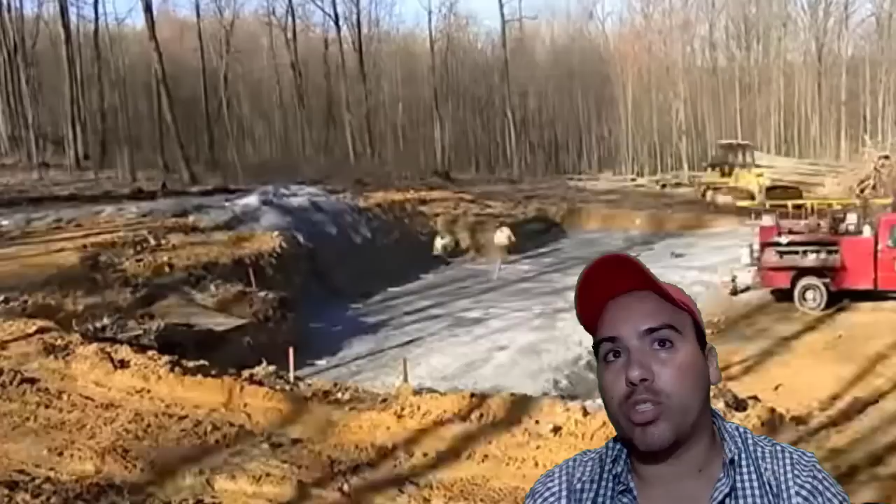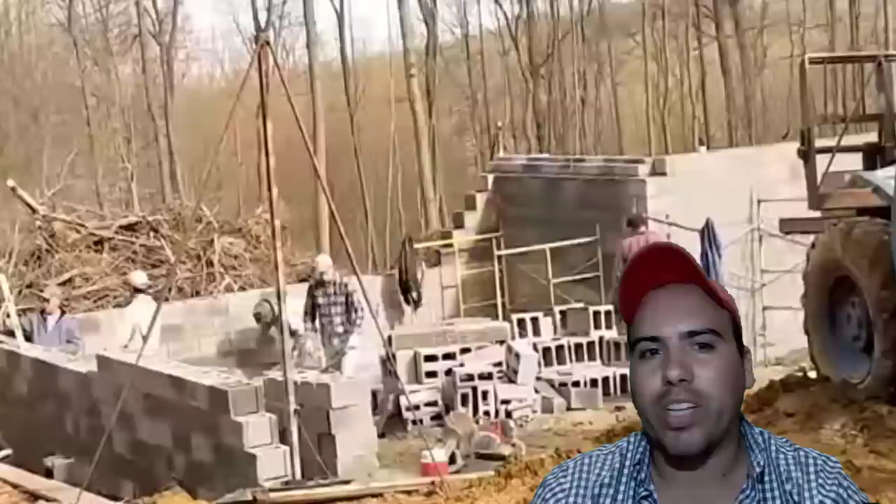I'm an architect, and I'm going to show you the main difference between building a house here in Mexico and building in America. Whether it's because you want a retirement home here in Latin America, running away from the bad weather, the snow and cold, you need to know there are several differences between building here in Mexico and building in the United States.

Hello builders and contractors. First, I want to tell you this is going to be a hard one, because not even in Spanish do we agree on the terms we use in building. I'm going to be using Mexican Spanish, but even within Mexico, in different parts, the same things I call here are called differently in other parts of Mexico.

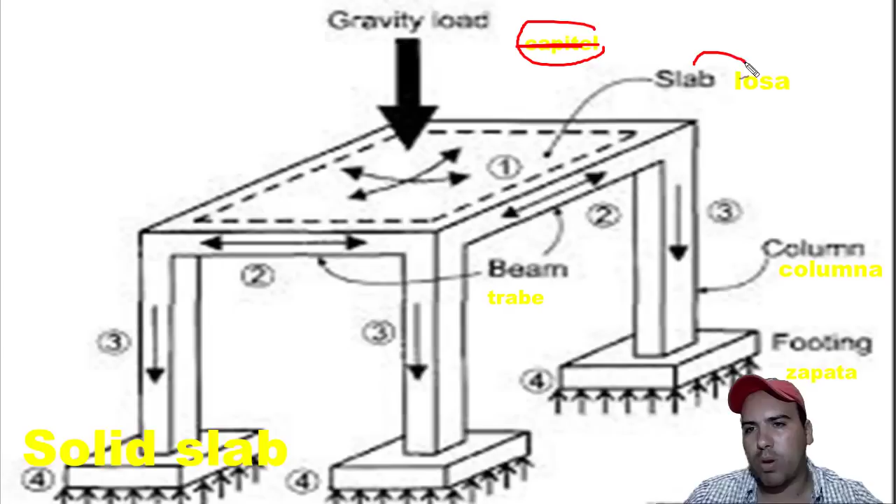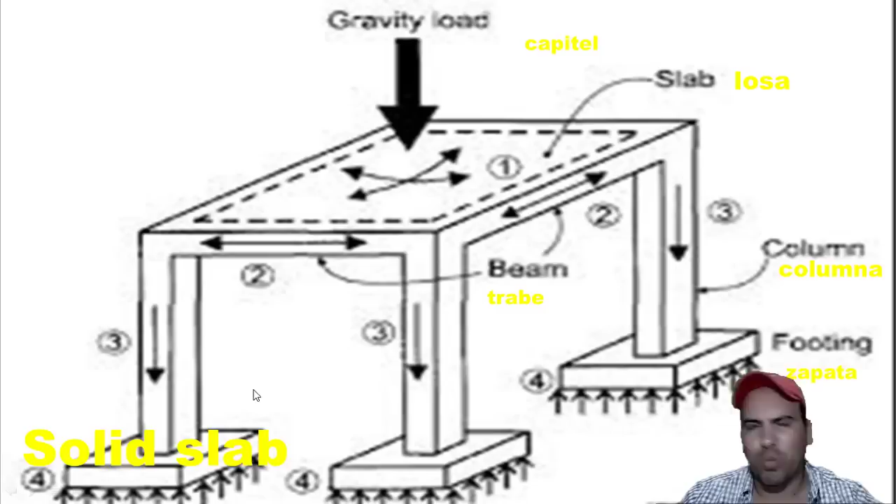So first we'll start with the foundation, and as in every construction, we do the excavation to find out the good soil. After we do the excavation and separate the good soil, we do the foundation, and this is pretty much the formwork for the foundation.

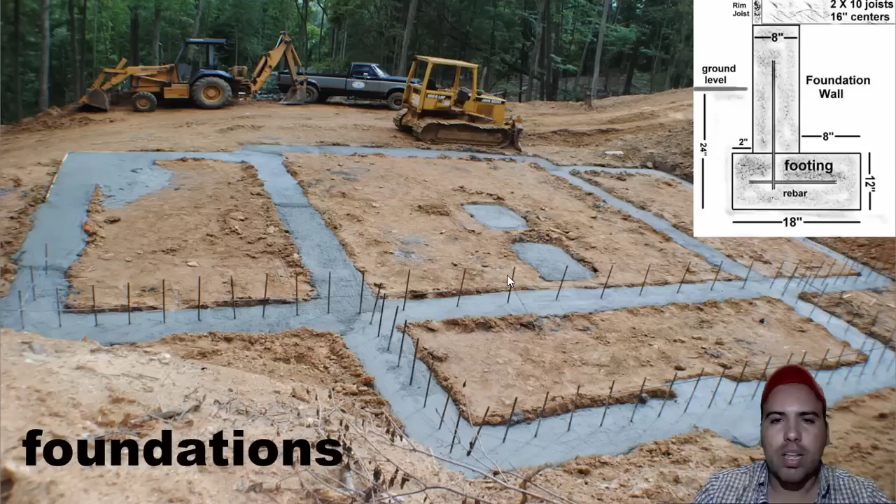This is pretty much the foundations here in America. I will not say those are weak, but it's because you guys use wood for home construction, not for big buildings. I know you use pretty much the same procedures, but those footings aren't as big as what we use, because bricks are heavier and things like that. So it depends—it's because you guys use lighter materials.

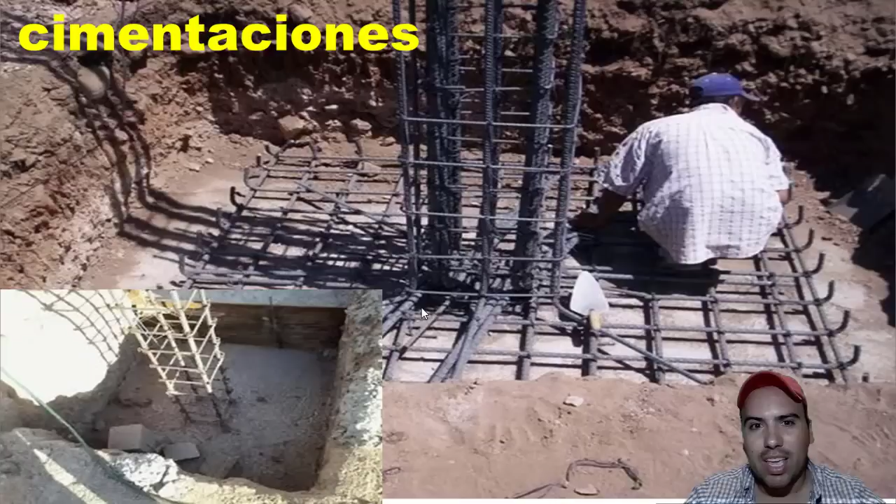We pretty much use concrete in Mexico, and the sizes are bigger because we have all the pressure that spreads out. If you have bigger weight, then you need more area to spread all the weight that goes to the ground. And on the soil, you have to check the strength of the soil.

We do not use them unless it's like sheetrock work, especially when it comes to interiors. So we're kind of familiarized with this kind of work when it comes to sheetrock, and also the gypsum boards. We use them on pretty much interiors. But we do not use the studs and also the joist stuff, unless it's like, you know, there are several parts of Latin America, I don't know, I'm pretty sure that Chile and also some parts of Mexico where they have a lot of forests, they use this system but not very much.

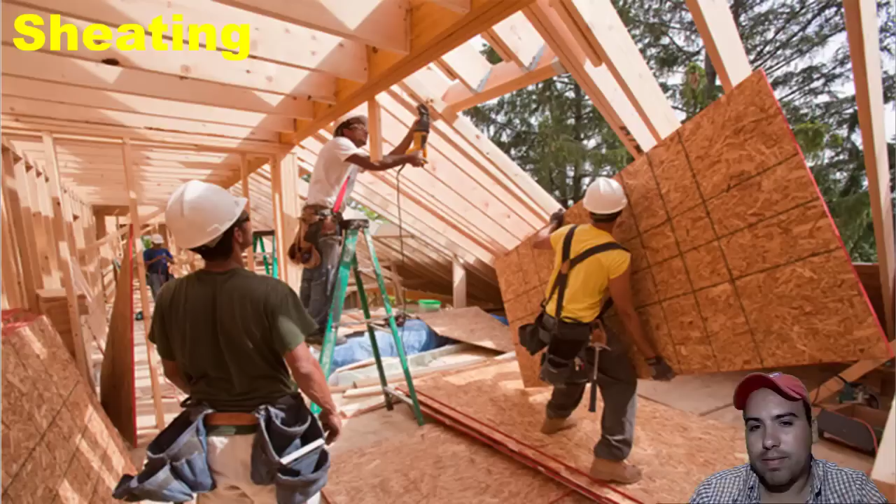Now you see more examples of framing, and this one, after you guys are done with the framing, you guys start doing the sheeting. This doesn't stop until you do the sheeting and all the layers. I'm not here to detail everything, I'm just doing the general thing so you get an idea of how we do things, and why we do not have all these sheetings, all this stuff, like the insulation layers, which this system is pretty much saying that it's saving you.

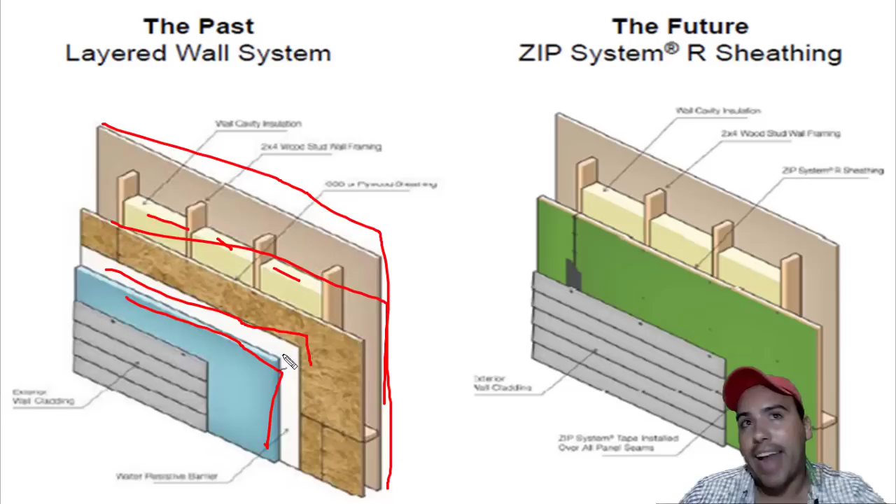You only do the siding and cladding and everything, but we don't have it here in Mexico because we use a different system, which is the bricks and pretty much the mortar we put on the walls, the plaster, and also the tie columns, we call them castillos, and also the bonding beams on the top are called cadenas. And yeah, pretty much that's how we start building homes here in Mexico.

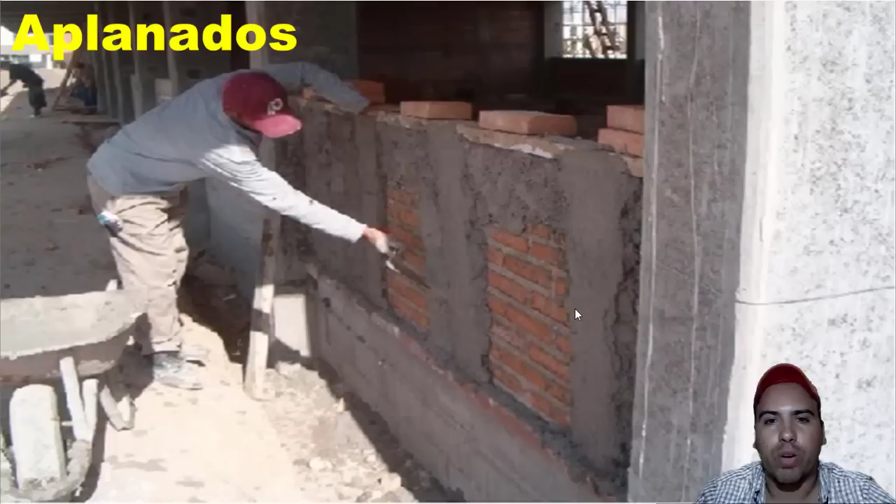Now, when it comes to Mexico, we don't do the sheathing. After we're done with the bricks and the structure, the concrete structure, we do what we call aplanados, which is pretty much kind of like stucco, but it's not stucco. We do know stucco, but we do it with a mortar, which is pretty much made of cement and sand. And after we mix them, then we start putting it on the walls. We do level them. And also, because the bricks are not perfectly made, so some of them might be off, and we have to fix them with the plaster on the walls.

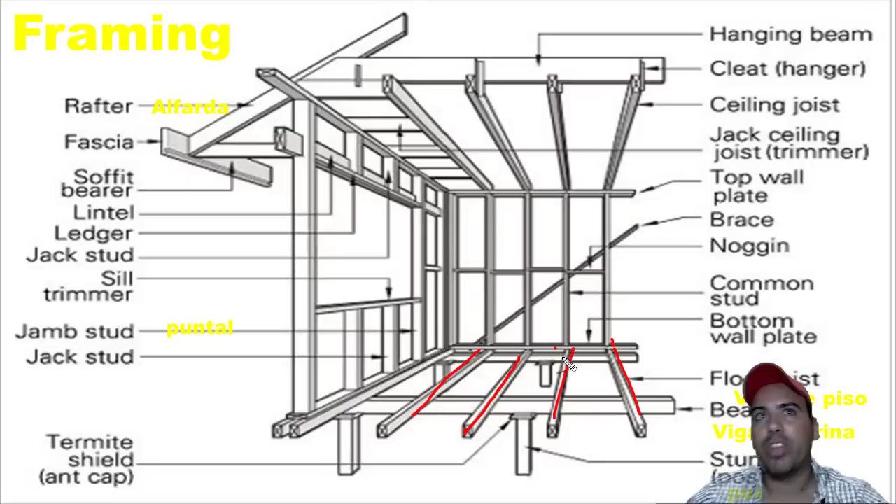When it comes to floors, you use joists, slabs, and also some sheathings, which is shown here. But when it comes to Mexico and pretty much a lot of parts of Latin America, we do use concrete slabs, like the one I showed you first.

So when it comes to slabs, there's the grid slab and also the solid slab. I'm going to talk about the grid slab because it's like the hardest one, and the solid slab is pretty much easier to explain and also to figure out.

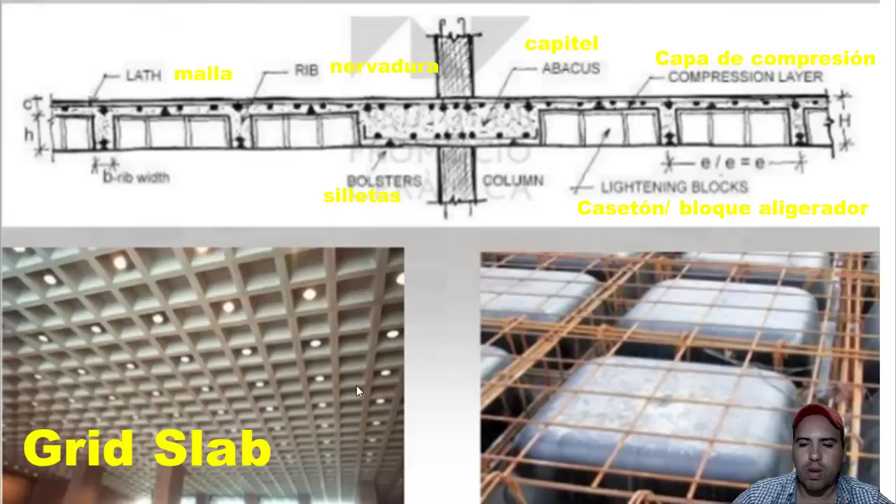And when it comes to the plumbing and wiring works, in Mexico we call them installation to both, because I didn't find the word, facilities or anything like that, but we're pretty much installing, like the plumbing, installing wiring and everything. So we call them instalaciones, which is installations.

So when it comes to plumbing and wiring, we're pretty much familiar with that, because we also do the sheetrock work, and when we do sheetrock, it's pretty much like the same. So if you are employing Mexican hand work in the United States, they're used to it. The only differences here in Mexico and the United States is like this.

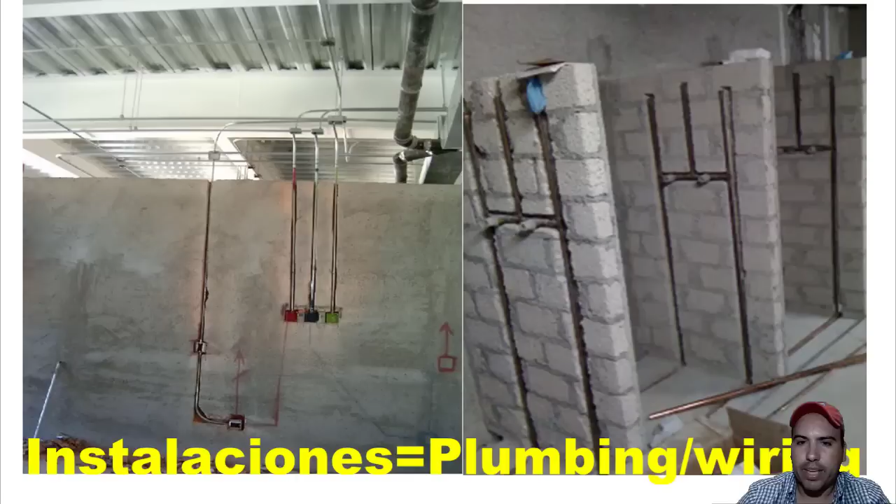The wires, we use like some sort of orange hose. You're gonna see it on the next pictures, because we do groove the walls. Since we have brick and mortar walls, we do groove the walls. We also use the piping, the conduit piping, and then we groove the walls.

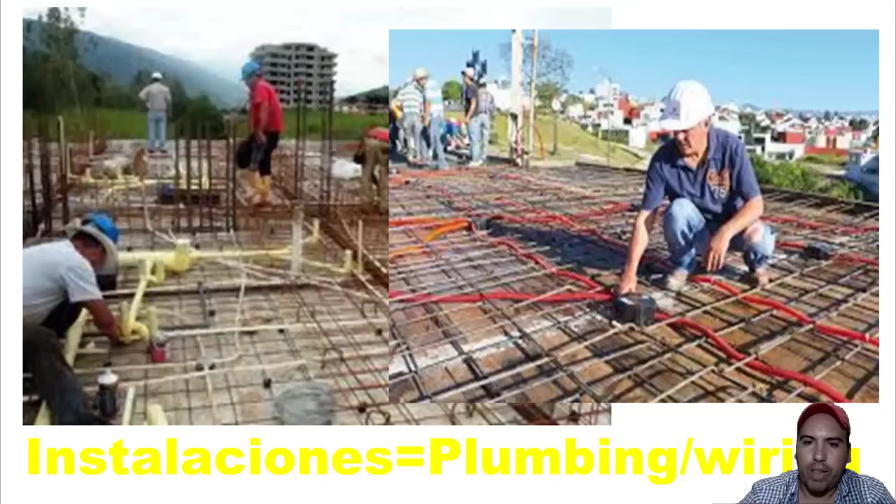And then we put the hoses or pipes, whether it's plumbing - we use pipes for plumbing, and we use hose, or orange hose, for electrical wiring.

But when it comes to, if it's like a slab, if you happen to be an architect and you work in big construction works, and they pretty much do the slabs with concrete, we pretty much embed all the installation when it comes to homes, and the hoses like this, all the.

I do not recommend embedding the plumbing on the concrete, because when you want to do a repair, it's kind of hard to do. I don't mind with the electrical wiring because it's easier, if you want to just pull the wire and that's it. But when it comes to pipes, if a pipe gets damaged, there's a lot of mess with the water and everything. So you gotta watch out for that.

So if you're planning on investing in building a house, pretty much tell your architect that you want all the plumbing and also the pipes, whether it's underneath the slab and you use a false ceiling made of sheetrock, or you want it on the walls. You gotta watch out, because you gotta be careful with the repairs of that.

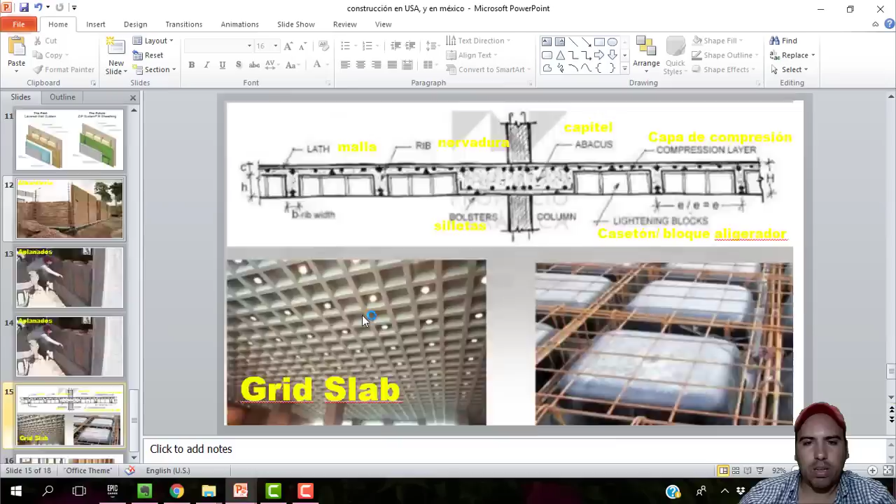Así es, constructores. Bueno, pues lo que se trata en las instalaciones, los americanos y los canadienses no tienen una palabra como tal de instalaciones. Ellos le llaman plumbing, que es plomería, y wiring sería como cableado. Entonces es muy similar a cuando están utilizando y haciendo muros de tabla roca. La diferencia es que muchos americanos no utilizan las mangueras, sino que meten el cable así tal cual en muchos lados. A ellos les encanta hacerlo así, y en muchos lados así lo quisiéramos hacer, pero las regulaciones no nos dejan y hay que tener ese detalle.

Ellos ranuran, le llaman grooving a la ranurada, y prácticamente casi no me ha tocado una obra grande en donde ellos tengan que estar ranurando. Prácticamente todo lo meten a través de los muros de tabla roca o los muros de palo, los famosos muros del framing. Por cierto, si ustedes se van a buscarlo, framing es como marcos, pero en realidad no es un marco, es una estructura de madera. Así defino yo el framing, a lo que ellos le llaman framing.

Well, this is it pretty much. Thank you for watching this. I also have like several differences between them working here in Latin America.

I've seen it in America, you guys have like specialists for everything, like the guy for roofing, the guy for wiring, the guy for this and for that. And when it comes to Mexico, pretty much all the work is made by the albañiles, you know, all the construction builders, unless it's, you know, like pretty much wiring and plumbing, those are made by specialists. For everything else, you know, when it comes to putting the concrete, also like doing the masonry and everything is made by the albañiles. Also, you know, when it comes to making windows and everything, you have to call in a specialist too. But it is, you know, it's kind of like the same in the United States and Mexico. Pretty much windows and doors and everything, you have to call a carpenter or a guy who specializes on aluminium and crystal and everything like that. So pretty much this is it.